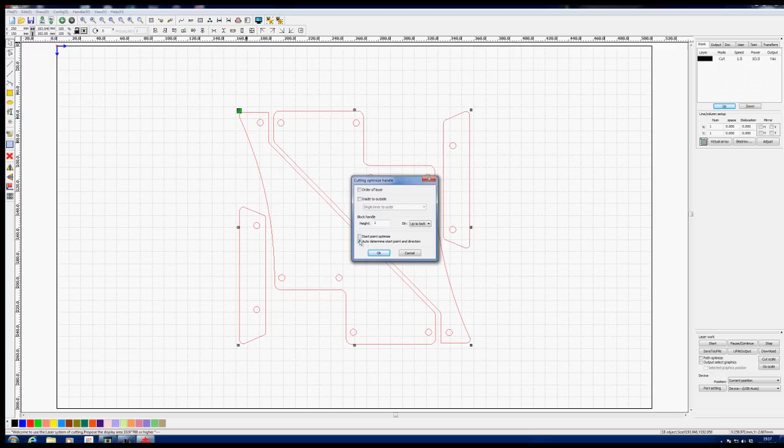The first thing I'm going to do is put a marquee around it, and I'm going to go up to the handles and cut optimize, and I'm going to make sure I've got nothing ticked here. I don't want order of layer or inside or outside, auto determination of the start point, but that's all I want. Edit the cut property, and here, if you remember, we want to make sure that we cut all the holes before we cut any of the outside shapes.

So let's pick some outside shapes to start with. There's one. We'll send that across to that list there. There's another one. We'll send that across to the list. Then we've got this one, which we will send across to the list. And finally this one. Send it across to the list. And now we can send the rest of this across to the list with the three arrows.

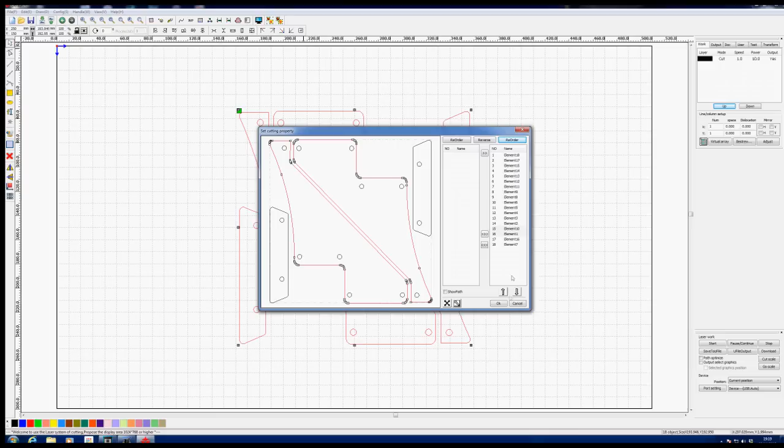We've got our outside shapes at the top, the first pieces to be cut. We want them as the last pieces to be cut. So what we do is we reverse the list and reorder it. And there they are, they're now down at the bottom of the list. Okay. Now we can check that out with a preview. I'm not going to do that because you're well familiar with that, but that will just prove that what we've done is correct. All the holes will cut first and the outside shapes last.

Typically you would expect to be able to cut maybe 5 or 6mm perspex. I do know that if you cut round something twice, generally it will fall out. Now whether I can get 10mm to fall out in one go was an interesting question, but I did do some experimental work and I found that 2 hits left a ragged edge, which I shall show you later on. But one hit, provided I go in at something really ridiculously slow, like about 2mm a second, then it seems to cut all the way through.

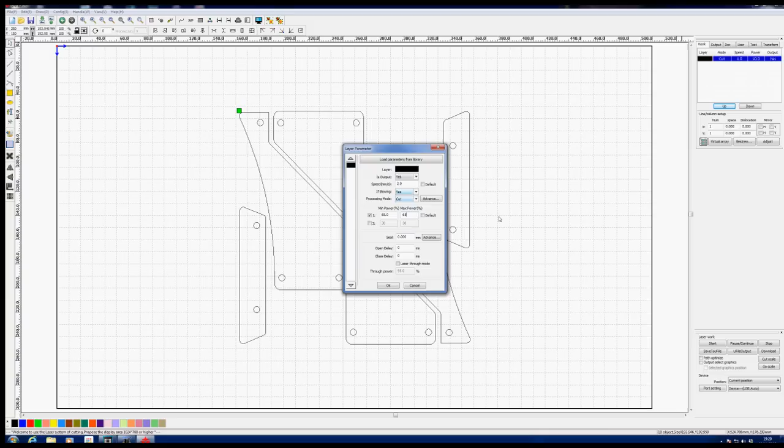I'm going to set my power to 65%. Those of you that have been watching the video will know why I'm using 65%, because that's where I get maximum power out of my tube. Even though I could program it at 100%, I will get no more power out the tube. I'll just drive the current up and burn the tube out quicker. We'll make sure that we have laser through mode unticked. For what reason I don't know, but I never tick it. So save that to a U file and we'll carry on with another part of the job now.

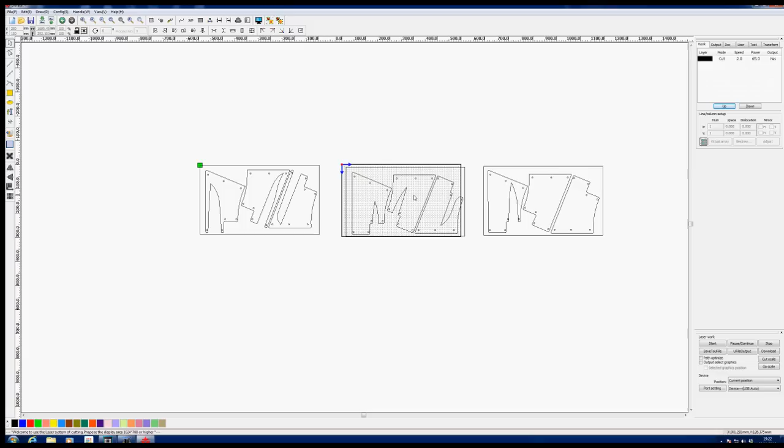We'll just clear the screen and we will import. When I scroll out, you'll see that I've actually got 3 pieces of material, 3 drawings on here. Now I'm importing them all at once on one import file, but what I'm going to do is to delete 2 of them for the moment, and then I shall import them all again and delete the 2 outside ones, and I shall import them all again and delete the first 2. So eventually I shall program all 3 of them.

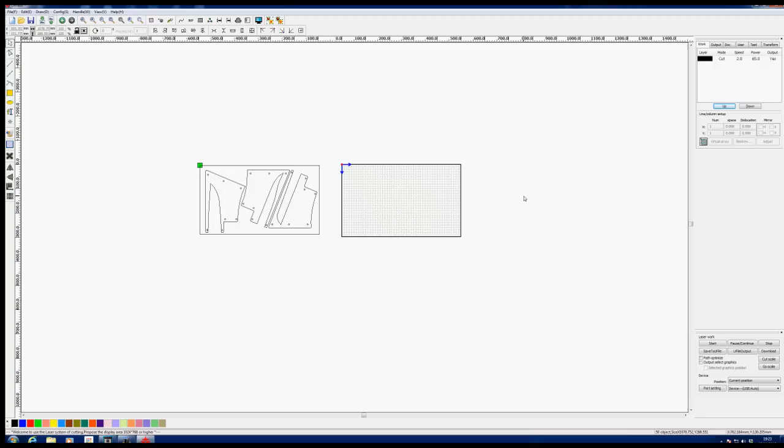I'm not going to go through programming all 3 of them because they will all be programmed in exactly the same manner. So we won't bore you with that. We shall just do this one and put that onto our work area, and then we'll use the middle magnifying glass to bring it up to size. There's my piece of material around the outside that I've programmed this into. So the first thing we should do is click on that and delete it.

And those are the three parts that I'm making. Now, you will obviously recognize those as shapes for a knife blade. So what I'm actually making now is a knife holding block for these rather expensive bits of cutlery that I'm getting.

Okay, this is going to be manufactured from 3mm clear acrylic, because that's what I happen to have. I could have got away with 2.5mm, but I can't go much thinner than 2.5mm because I need to be able to handle the thickness of the blade, which is about 2.3mm thick. So 3mm is an ideal material for me to be using.

Okay, exactly the same principles apply here as they did to our previous job. We've got this already set up here. We'll put a marquee round there, and now we'll just go and check up here on the handle, cut, optimize, just to confirm that we've still got nothing ticked except the auto determine the start point. And now we'll go up here to order our cuts.

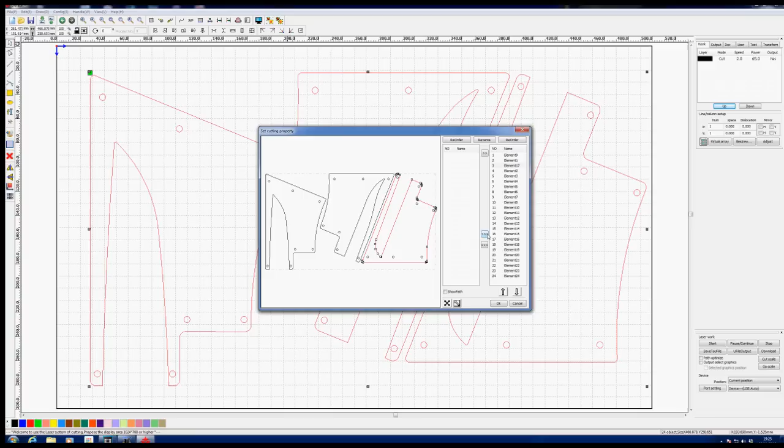We edit the cut property, and we'll take the outside shape there and we'll move that across to the second column. We'll take the outside shape there and move that across to the second column, and the outside shape here and move that across to the second column. And then we'll send all the rest across, and then we'll do a reverse, reorder, OK. Job done.

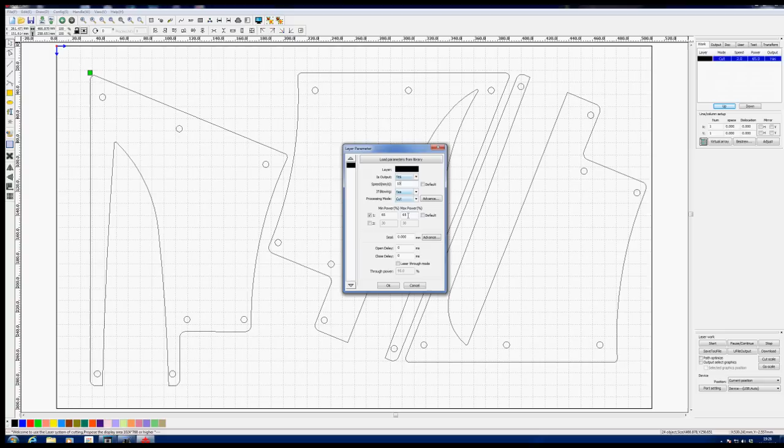Except we haven't set this. Now this is 3mm acrylic, and my best guess for that is probably something like about 10mm a second, and 65%, which is the maximum power that I'm going to get out of my tube. That doesn't mean to say I'm going to get 65% of the power. It means I get 100% of the available wattage at 65% program. Now we just need to save that to a memory stick, and we'll meet up at the machine.

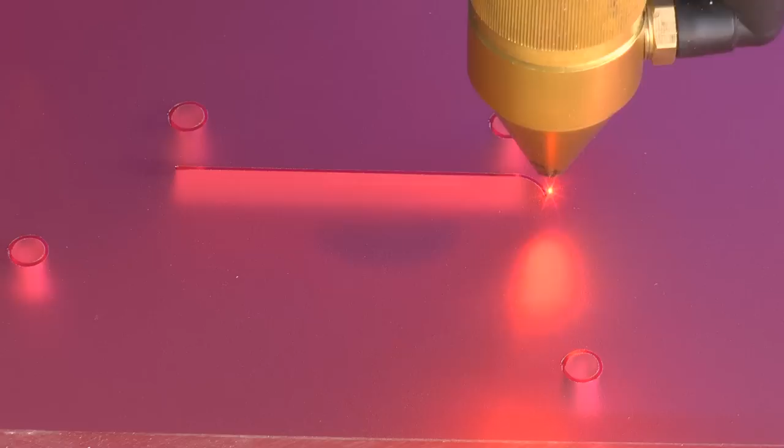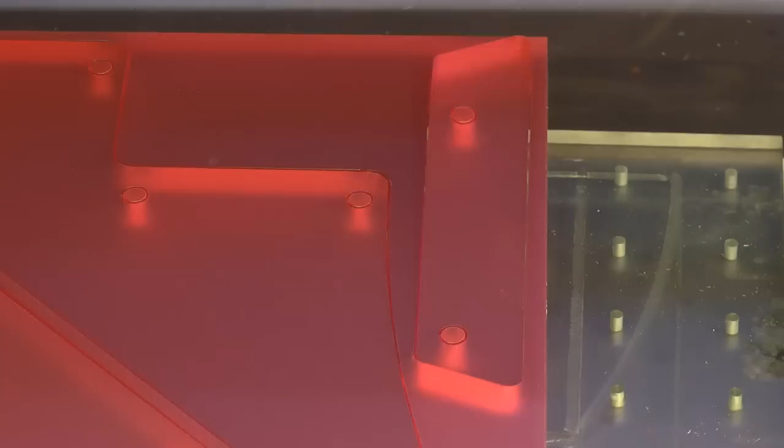Now that's looking very promising at cutting through 10mm thick acrylic. Just when we get to the edge of the material here, you'll see that we've definitely got smoke coming out from underneath. I think, as you saw there, it's actually cut that out, look. So that's 10mm thick acrylic cut at 2mm a second. The edge is a little bit tapered, but that's to be expected.

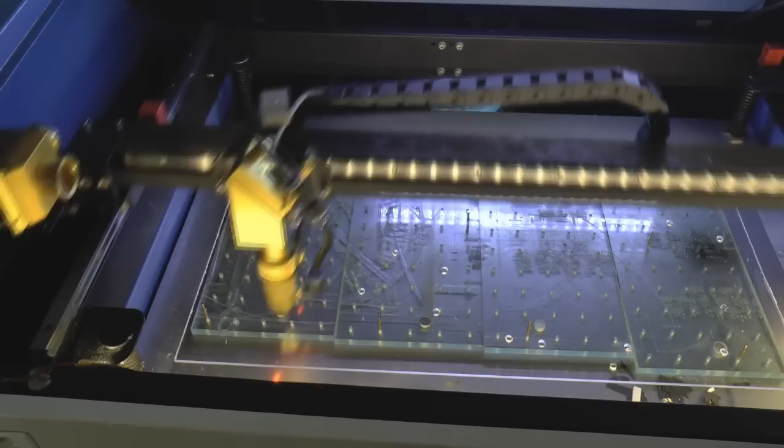And this one, just a little hold up with these holes, but not a lot. Look, they just pop out. This is 3mm acrylic cutting at 10mm a second, 65% full power.

So you can see the extraction is drawing the smoke away from the underneath of the cut, so you know that it's actually cutting right through. I think if you look carefully, you can see that I'm supporting this job on my pin base in places where the cut is not taking place. So there's no chance of me running over any of the pins.

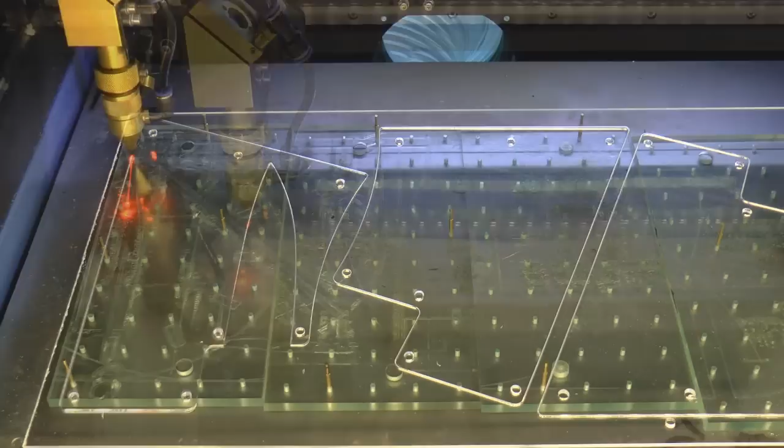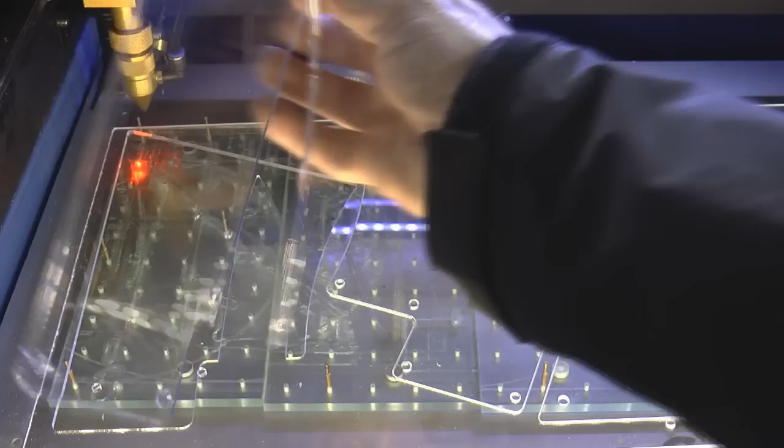And I think there's the answer to your question. It's cut out completely. It's a very nice edge. Well, these are the last ones that were cut out of 10mm, and as you can see, they're just falling out. 35 degrees C was my return temperature from the laser, so the water temperature at 35 degrees C has not affected the cut at all.

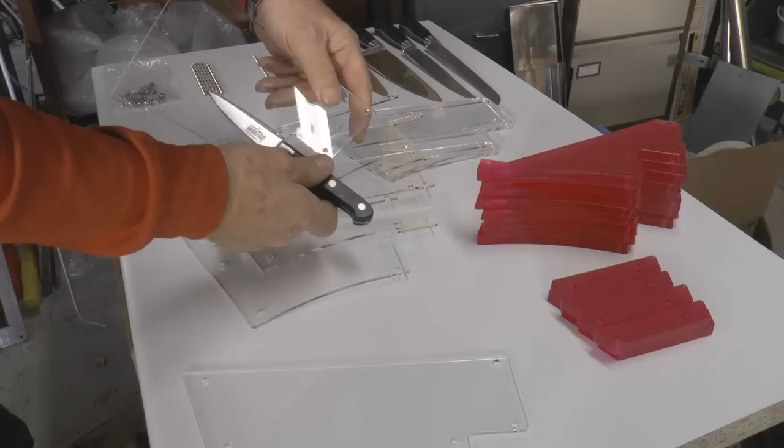Well, here's the set of knives that I've bought for my wife, and as you can see, I've made all these inserts. I've designed and manufactured all these inserts so that they almost fit the knives in question, so you can't get the knives in the wrong order. So what we're going to do now is to assemble these pieces, and I'll show you how it all fits together. So we've got some stainless steel dome nuts here.

They're M5, and I'll put 3 or 4 of these together to start with. I think if I try and put them all in at the same time, it's probably going to cause me a few problems. Well, I'm going to put 4 in to start with, and you'll see why. We start off the bottom here with a plain plate. Okay, now we just pop those on there like that, and then we put our first coloured plate on, and then we're going to put one of these on as well.

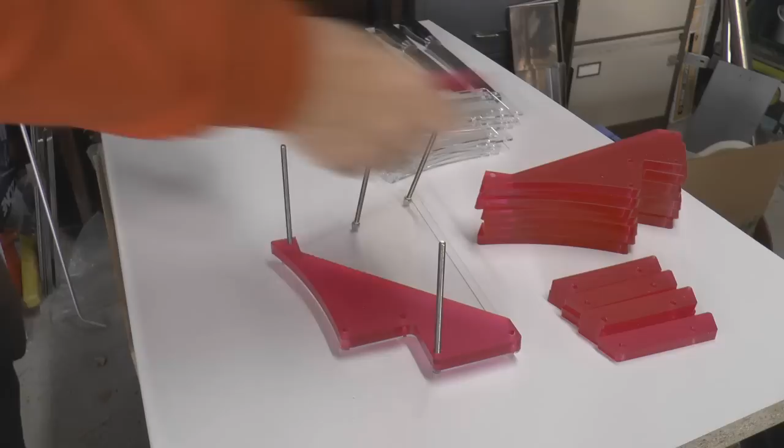Like that. Wrong way around, sorry. That one goes on there. And let's also put those there so they're ready to drop straight onto my assembly here. And then we'll pop one of these plates on. And then one of these plates. And a spacer. Now it might look as though I'm picking these plates up randomly, but I have actually sorted them out into an order before I started piling them up.

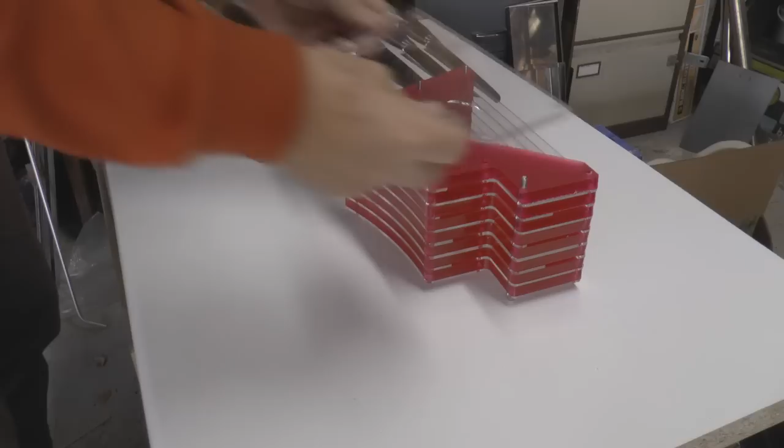And then finally a plain end plate. And then I should be able to put some nuts on there to clamp the whole thing together. Put the remaining 3 items through the holes that are left, because they should be lined up. Just tighten those up slightly later on, but there we go. There's the finished assembly, and there's the end result.

So all I've got to do now is find a suitable box and wrap that up for my wife for Christmas. Although my good wife has always wanted a set of really good chef's knives, these don't have diamonds in them, they're not sparkly, and they're not 24 carat. I don't really know how this is going to go down as a Christmas present, but perhaps I should take the edge off my sarcasm and wit before I find out just how sharp they are.

Now here I am cutting 10mm thick acrylic on a 50-watt machine that might actually finish up being a 40-watt machine when I actually find out what it's capable of doing. But nonetheless, I'm extremely pleased that I can cut 10mm in one go with this machine. I started off doing some test squares, and I was planning to do 2 cuts, one after the other, to try and get the depth. But it really wasn't very successful.

It worked, but if you look carefully, you can obviously see cut 1 and cut 2. And it's not produced a very good edge. So rather than run 2 cuts at about 5 or 7mm a second, I decided I would try 1 cut at a very slow speed, 2mm per second. And this is the end result. That's very good. But it did throw up another problem, which is nothing to do with the speed, but all to do with, I think, probably the alignment of my beam.